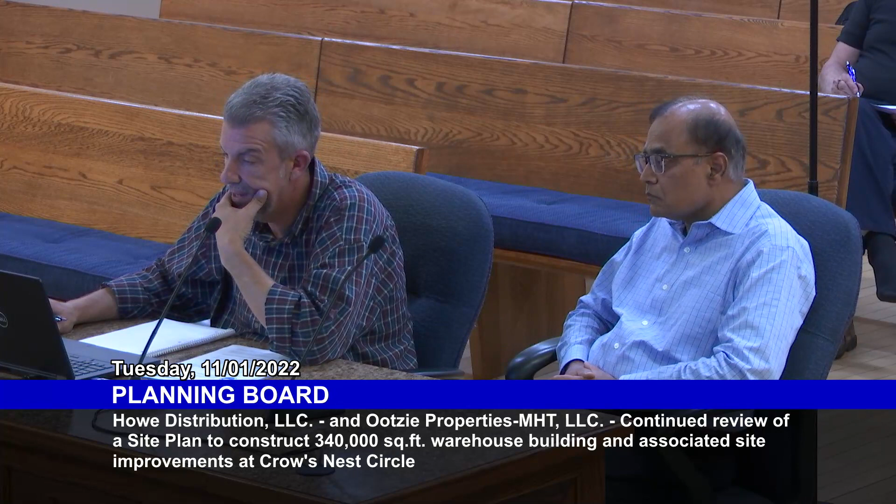Good evening, board members. Again, we are here to discuss this warehouse project that was before you last meeting. We have done some adjustments and revisions and tried to address some comments as best we could in the limited time frame.

Again, we are in front of you for an approval or conditional approval of the proposed warehouse project. Some of the comments you folks had brought up in the last meeting, such as providing a truck turning plan, we did provide that in the most updated set. We did call out the walls a little more clearly with elevations and whatnot. We did put some signage to address truck access, as we had talked before, with the truck access being this southern entrance closest to Mast Road and the vehicular access being at the end of the cul-de-sac.

We are asking for additional waivers. We did look at the sight distance, and we would add that because of the speed that vehicles are approaching into this road, it not being a through street, less reaction time is needed, which is typical of the sight distance plan and profile.

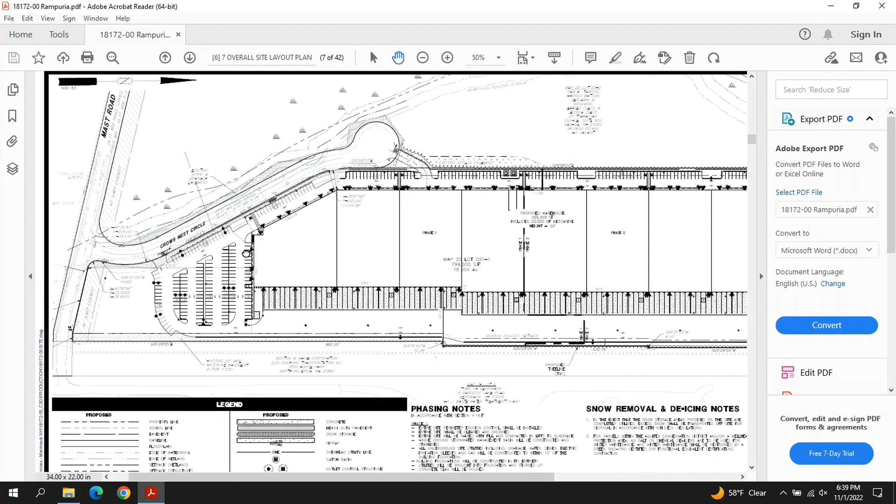We would also reiterate that the truck entrance being at the southern portion of the site, their sight line is actually going to be much higher in the air than the vehicles exiting the cul-de-sac. So we'd be happy to address and do the sight distance plan and profile if that's the board's pleasure, but we feel that, based on this road being only for this particular lot at this time, and the fact that a vehicle needs to slow down quite extensively as it enters the cul-de-sac, that it's not really what we would consider a safety issue.

Aren't site distances speed dependent? Typically, yes. DOT recommends 400 feet sight distance in either direction. At what speed though? That is, I believe, for 40 miles per hour. So you'd have a shorter sight distance on your slower road because this doesn't have a 40-mile-an-hour speed limit, correct? And obviously at the southern entrance, we're pretty much looking at Mast Road. And then at the cul-de-sac portion, they have the whole road worth of length.

I wanted somebody to confirm for me that site distances were speed dependent, but assuming that they are, then whatever you would have to show on the plan would be decreased because you're obviously on a low speed limit road. We would anticipate maybe 10 miles an hour on this road, simply because of the size of the vehicles and the fact that it's at a dead end cul-de-sac.

So Crow's Nest Circle is a public road, is it not? Yes, it is. And based off the speed limit of the road, the town standard speed limit is 30 miles an hour. So what would the sight distance requirement be for a 30-mile-an-hour road?

That would be the standard determined in our right-of-way permit regulations that the Public Works Department has. I don't have those specifics, they're referenced in the regulations, but we don't have a specific requirement. But the necessary sight distance changes based on speed limit, is that true? That's correct. Generally for a 35-mile-an-hour road you're looking at 300 to 350 feet of sight distance, and it might be slightly less for 30 miles per hour.

What's the length of Crow's Nest Circle? The whole road? I think it's a little over 1,000 feet to the end of the bulb. Okay, so 300 feet is roughly about a third the length.

Whether you have 300 feet or not, the board could consider whether it wanted to grant a waiver of that requirement, but without seeing it on the plan, we don't know what the sight distance available is, so we don't know if it's compliant. That's the reason we're not supporting the waiver, we don't know what distance is actually available there. When we get to the point of talking about waivers, you'll have an opportunity to present whatever argument you want, and the board will hear you and have questions and proceed from there.

Sorry for the interruption. We did go in front of the Conservation Commission and got some of their comments regarding using straw instead of hay, and the fertilizer requirement of no phosphate. I believe we addressed most of those, catching all the particular items they called out.

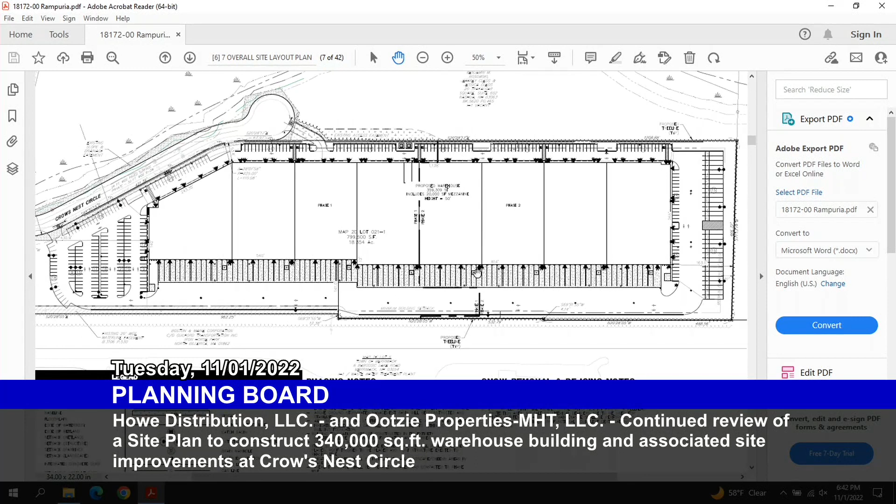Not much has changed from what we had before as far as overall site layout, it's still the same. We've added some directional signage stating no trucks at the end of the access to the site at the cul-de-sac, demarcating truck entrance on the southern portion, and additional signage on this corner of the building to keep trucks from going around there unless it's an emergency fire situation. Everything previously shown stays the same, all underground stormwater systems minus the above-ground pond at the southern end of the site.

And again, for septics, we have still not had any response from Pennichuck. We've been in contact with them from the beginning of this project to do some pressure tests and whatnot, but we still have not gotten any response from them directly.

What was Pennichuck's role in your septic plan? Well, Pennichuck will be supplying the water. They've also got a water line easement running through the back of the property, a 12-inch line I believe. Our intent is to connect to their line, so we'll need to meet their requirements. Oh, for water service, I thought you were saying something about your septic system. No, I was just stating we're still obviously going to be on septic as well. Okay, so on-site wastewater, thank you.

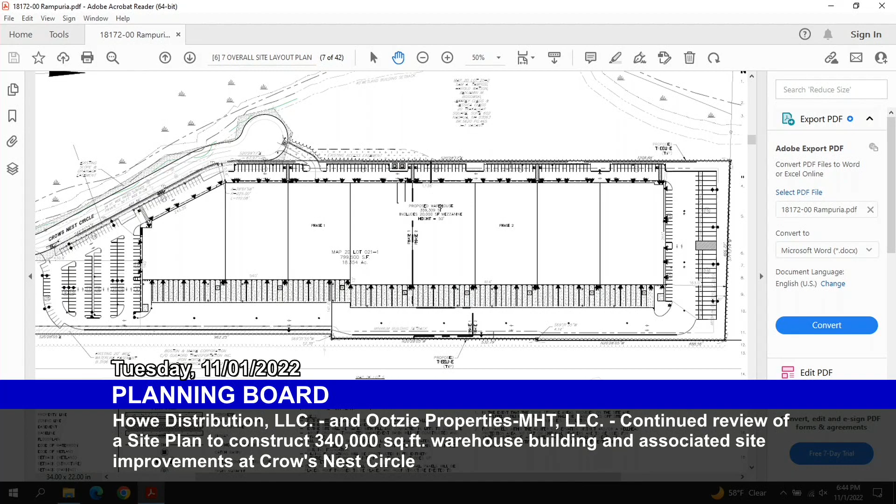Anything else you'd like to present to us? I know there was some discussion about wall height. We have looked at that - it's more of an interpretation of the base, below-grade level of the wall and the top of the wall. We've made a couple of minor adjustments, but we don't see an issue meeting that requirement.

So your plans are to lower the height of the wall to satisfy the community development department's interpretation of the regulation? Yes. With the type of wall we're proposing, it's roughly an 8-inch difference with the base block being buried - that's how it's considered height-wise, from the buried block to the top. That makes sense.

Anything else? Oh sorry, Lynn, go ahead. Matt, when you were talking about landscaping and parking, you've got 3 island sets of parking, and you said you're going to do some landscaping on the middle one - is that eliminating that parking? No, we ended up creating... let me just get to a point where you can see it a little better here.

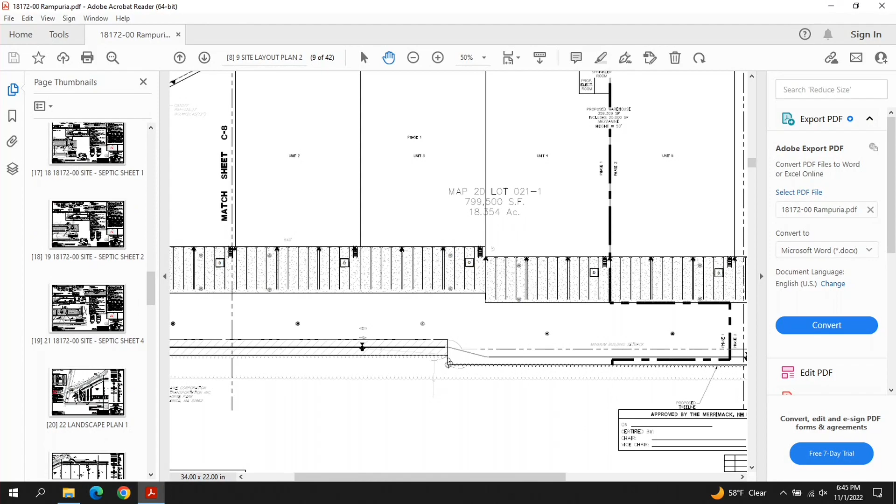You're just putting green stuff in between, adding some green space. It's breaking up and helping us also capture and break up some of the runoff that was originally coming across this whole parking lot. So we've added this island right here, and that's going to have green stuff in it.

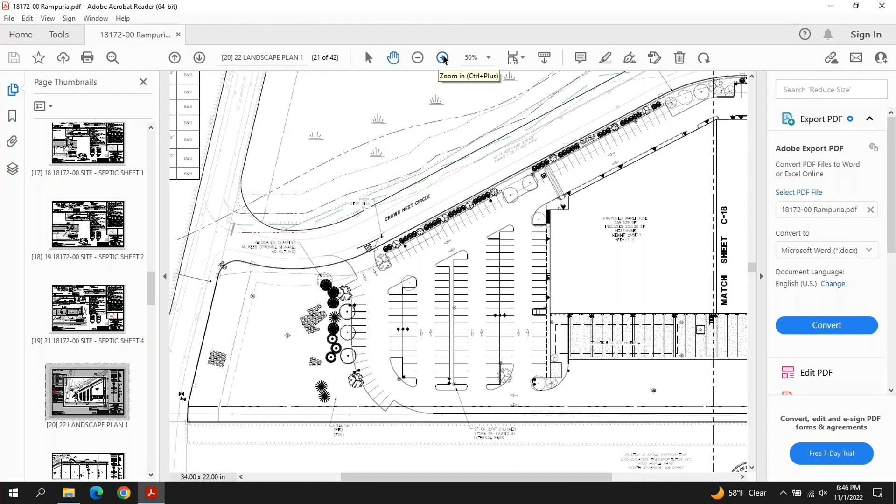How much area is there to plant bushes and trees? It's like a foot or two. I can measure it and tell you actually. Doesn't look very big. Yeah, it's probably about 4 or 5 feet is my guess.

How long's the parking space? 18 feet long is the parking space, so that's about right, 9 by 18, so it looks to be about half that. So what's new is the strip of green grass or whatever it will be that's in front of where the cars park, not the islands at the end. Correct, not the terminal islands. That's correct.

Thank you for that. Anything else that you'd like to present to us as part of the update? Again, we've used the biggest trucks, the WB-67s, and included a truck turning plan, which I believe the board had asked about before.

Again, these truck turning plans are usually pretty standard, but we have broken out the truck entering and exiting, and obviously these are WB-67s, which are interstate hauler trucks, as the worst case scenario.

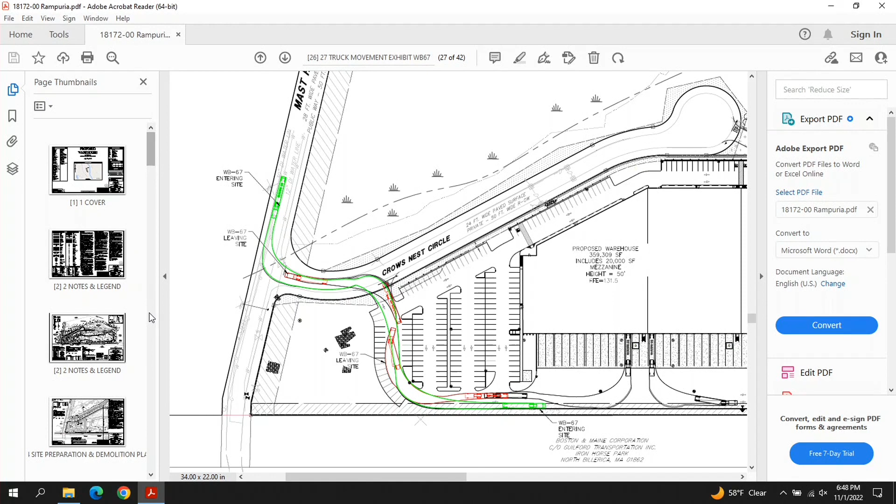Well, just going back to the landscaping issue, I don't see this, I didn't see the landscaping that he's talking about on the plan. If you go back to the one with the landscape, you don't show any trees or bushes or shrubbery in those islands or end caps for that matter.

Yeah, we've called it green space because again it's fairly minimal in nature as far as width. Trees don't typically do well in spaces 5 feet or under. I agree, so we would probably do ground cover, either grass or something of that sort that would fill in that space.

So inside the interior of the parking lot, I do see a couple of trees at the terminal ends, and then around the border. Can you walk us through what it is that you've got proposed?

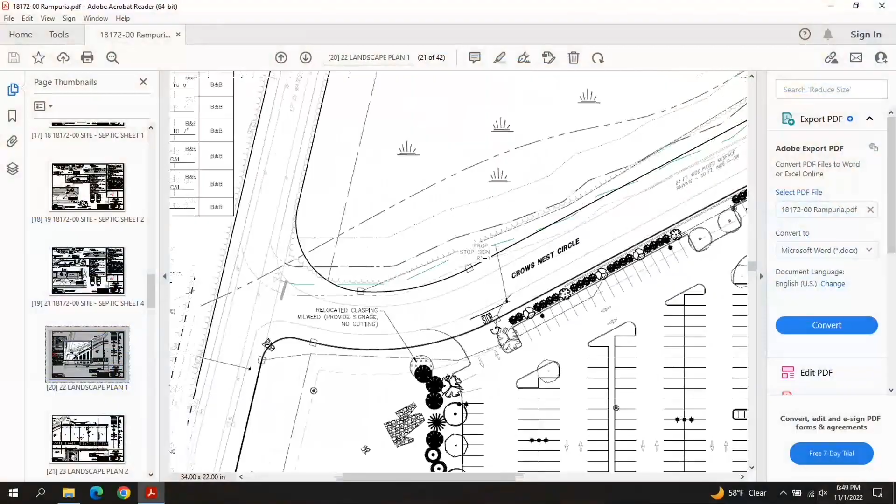Sure, you're talking types of trees and generally the size? Yeah, well I think the standard is again 3 to 3.5 calipers required for the trees. These are obviously in the islands here. We have provided shade trees.

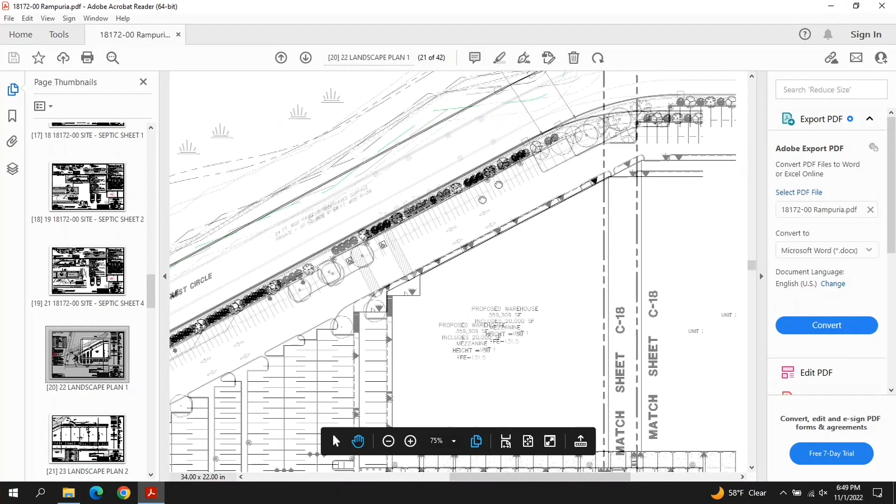Could you show those? I'm missing them. Oh, that one, yeah, so we've got one here, another one here, these over here. We're surrounding pretty much the whole parking area based on the number of parking spaces, so we have some evergreens up in here. But the majority of these are going to be deciduous trees that create some kind of shade along the edge of the parking.

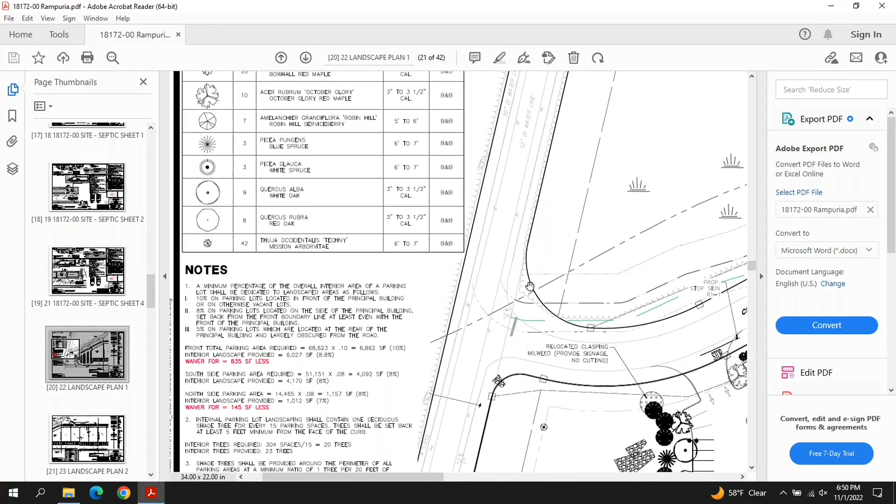And most of them are again salt tolerant species, salt and drought tolerant.

Now, I was reading the note that you added regarding snow maintenance, and it talked about snow storage and trucking it off site and all that. And the note wasn't really clear on the screen, the video screen, about the no salt or the Sno-Pro. Can you find that note for me again?

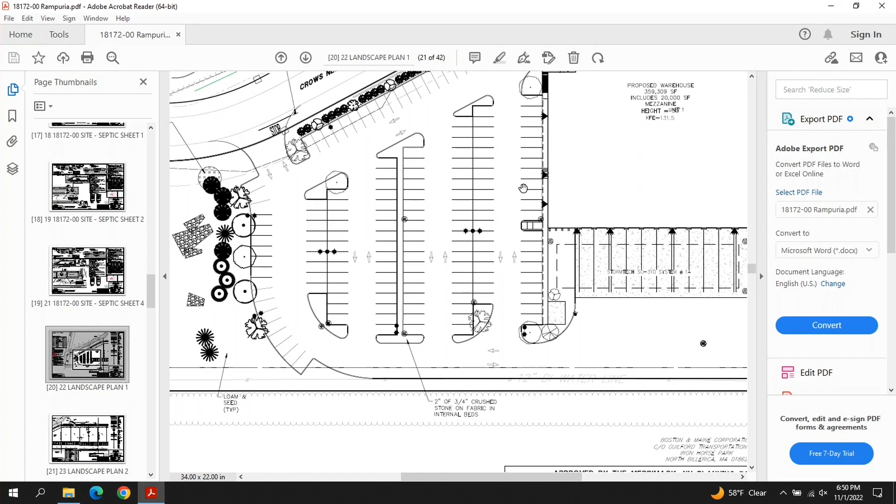I think that was on your overall site plan. Yes, I think so. It was separate, down here. There it is, to the right.

So for parcels within the Aquifer Conservation District or wellhead protection area, no salt or chemical deicers are to be used for winter maintenance, and winter maintenance shall be performed by a Green Sno-Pro contractor. Are you within the Aquifer Conservation and wellhead protection area for this? Wellhead, no. Aquifer, yes.

So you're going to have a no salt limitation on the site, and no de-icing, no salt or other de-icing chemicals on the site.

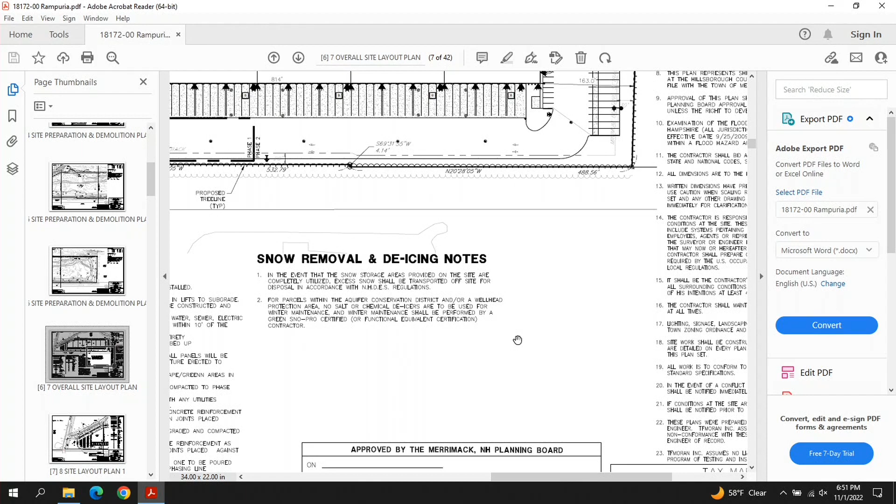I'm certainly glad the trees you're picking are salt resistant, but that shouldn't be an issue. Nelson, did you have other questions? Not on this particular subject. I don't think much of that landscaping plan, but that's not a question.

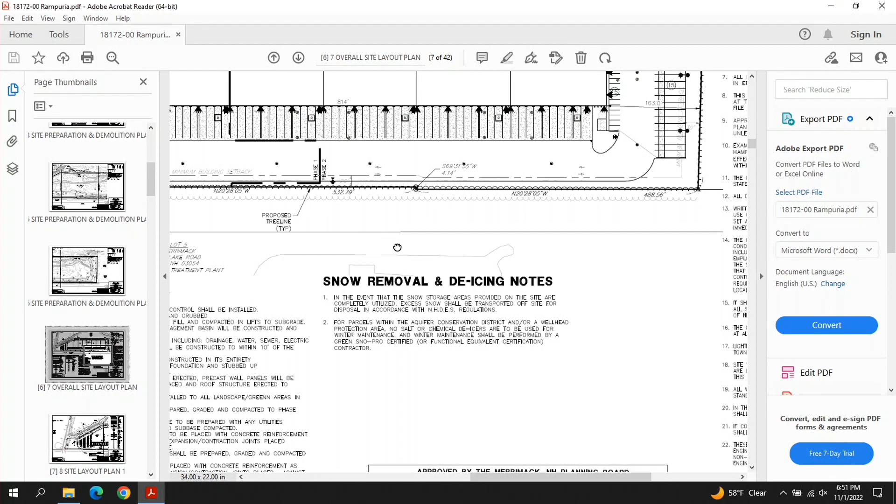Well, it's a worthwhile comment. If we were looking at a building with some significant public face, I would have more interest in detail into the landscaping plan. But down at the bottom of this road, where it is the last thing you see before you cross into the sewer treatment plant, I don't know that the choice of landscaping is particularly important there, but understand, at least some.

Other members of the board with comments or questions? I see this abuts the railroad. Have you given any thought to adding a switch for rail access for freight to this location? No, that was not part of any discussion. You can see pretty much the width of the railroad right of way and where it jogs further to the south. Their track is aligned center to that, so whatever they choose to do as far as making adjustments or widening falls within that right of way. But we have not looked at that. Anything's possible in the future, but it wasn't considered with this.

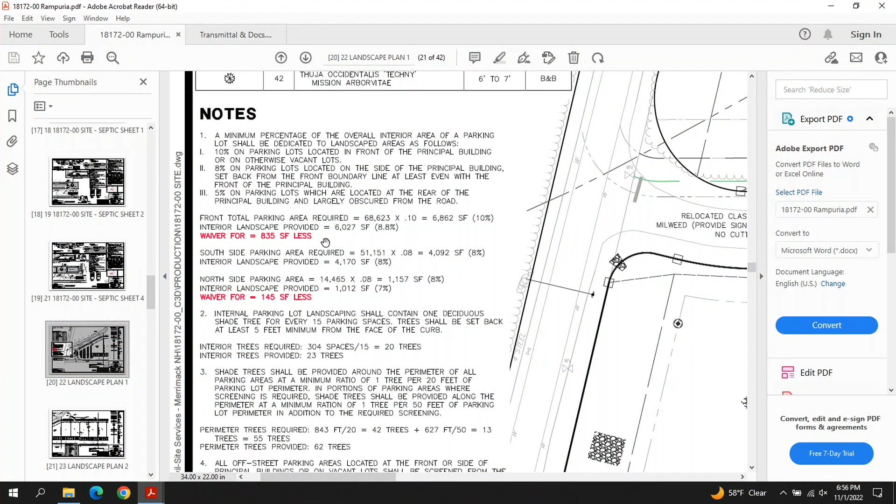Let me just jump back to the landscape plan, because that has obviously changed here. So the breakdown is based on kind of the front parking lot, which is the area to the west, where 10% is required, and we're at 8.8%, or 835 square feet less than what's required. The north parking area would be at the far end of the building where the truck parking is, and again we're at 7% where 8% is required, or 145 square feet less.

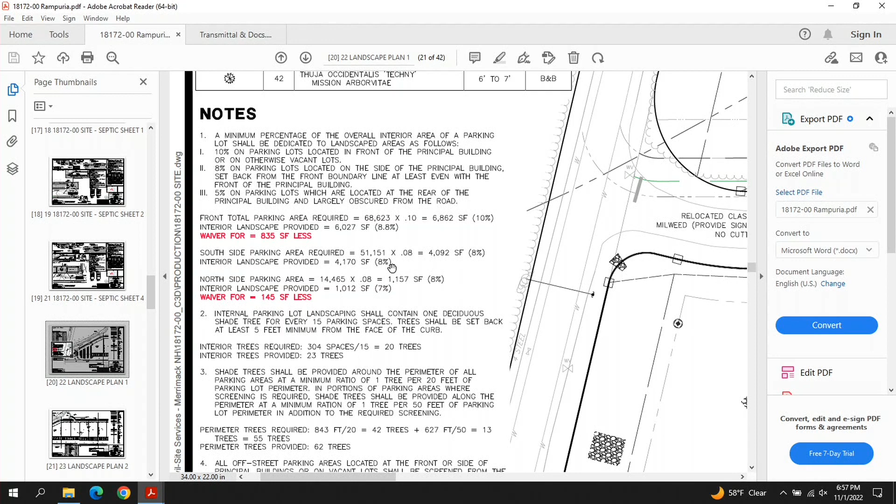Now, what's required of the tree setback from pavement section? That would be 5 feet. And what are you going to provide? I believe we have 10 feet between pretty much the edge of the pavement and the retaining wall, or the property line. The retaining wall is slightly off of that, but we have a guardrail right at the edge of the bituminous curb. So those trees -- the 5 feet is to protect the trees from being hit by vehicles and snowplows, because of the situation along Crow's Nest Circle and the minimal area. The trees will be protected as they'll be behind the guardrail, so the 5 feet kind of becomes a moot point.

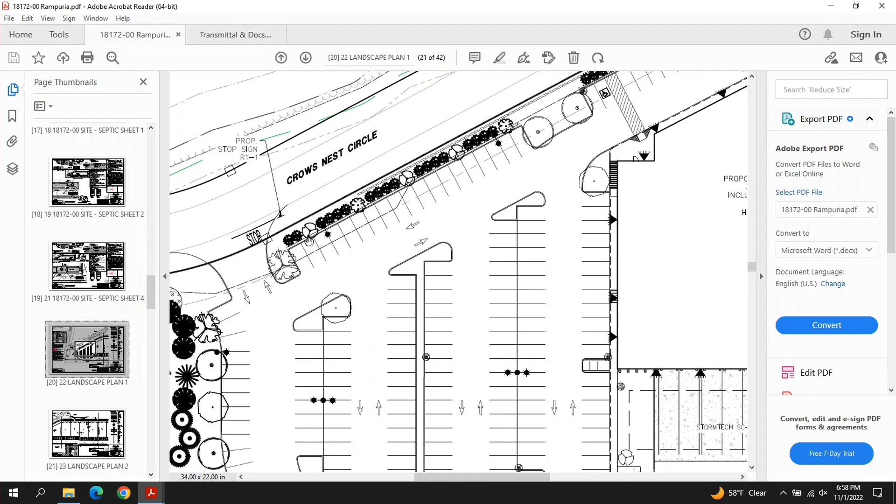I understand. How close are they going to be, feet-wise? I would say if we are at 10 feet, probably about 4. Do you have any concerns that the trees being closer to the pavement will cause damage to the pavement? Not based on the type of soils we have out there -- they're pretty loosely graded.

We don't have a particular concern. The trees located on that portion of the site where it's tighter are smaller species, with less extensive root systems. Certainly makes a lot of sense to me.

I just want to make sure you understand the expectation is that you'll maintain the number of parking spaces that are part of your site plan, and that they'll be useful and won't be in disrepair or end up being snow storage because nobody parks in them.

What's the requirement for the 15-inch trees? That requirement is that the applicant has to identify all trees on the site over 15 inches in diameter. Given the size and nature of the site, that would be an extraordinary expense to identify all those trees.

Where generally are the existing trees located that are of that size? Are they in the front? From my experience being on site and doing a lot of the test pitting, there's a few on the front end.

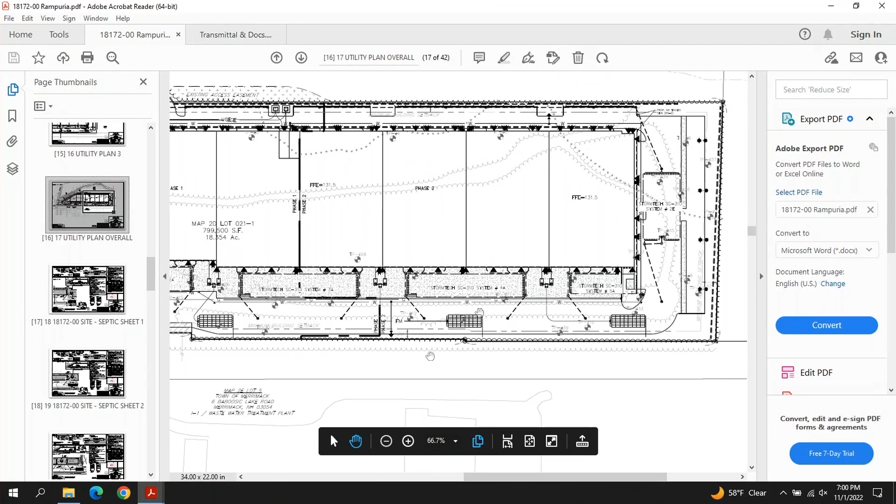Along this edge, because this whole property, as you can see based on the underlying image, you can see the path through here. So this was logged, I believe, back in 2008 or somewhere around there.

So it had been cleared before. So the size of the trees there currently are, most of them are not even close to 15 inches. Okay, certainly understand that.

Won't you have to get an AOT permit for this? Yes. Aren't they gonna make you map your trees? They will not make us locate 15-inch trees, they typically have us locate the limits of the trees, not the size. Now, either of those things is existing conditions - none of that's gonna remain on the site, correct?

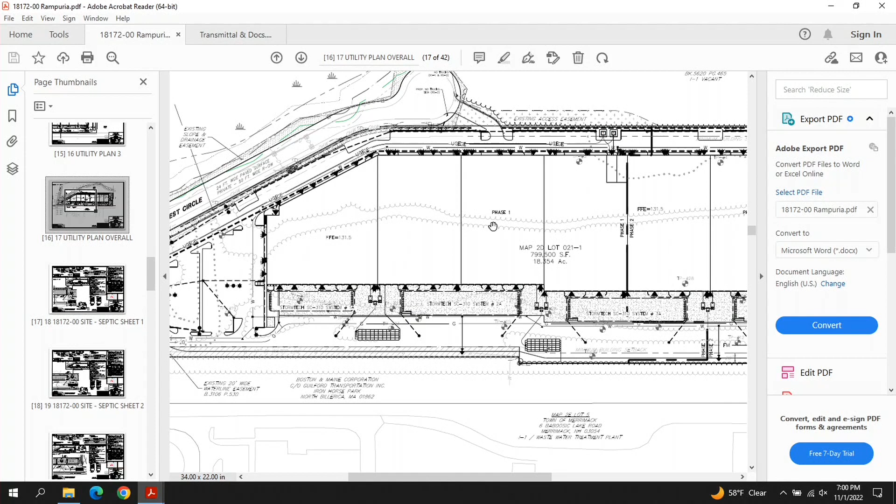Correct. We are pretty much impacting property line to property line. Is there any existing undisturbed forested area that will remain? Maybe a very small portion up on this corner near the existing water line easement.

Is there any existing undisturbed area that you are committed to leaving, or might there be some or might there not? There might be some, we're not necessarily sure. With that water line easement going through there, Pennichuck is going to make sure that nothing grows through there anyway.

With that in mind, I certainly don't see any need for us to have you map out trees that are going to be removed. With that, board members, do you have questions about the 3 landscape waivers that have been discussed?

Could you enumerate them again please? Sure, do you want the section numbers or just what they're about? The 3 waivers are: internal parking lot landscaping, the minimum setback of the trees from the pavement, and the location and identification of trees greater than 15 inches in diameter.

We're not talking about sight distance or the pipe size at this point. Correct. Thank you. Does that make sense? Does anybody have questions about the waivers we've asked about?

Whoever makes the motion, please make sure you add your justification for the 2 statutory criteria. Is someone willing to make a motion related to those 3 waivers? I would motion to approve those 3 waivers due to being an undue burden on the applicant.

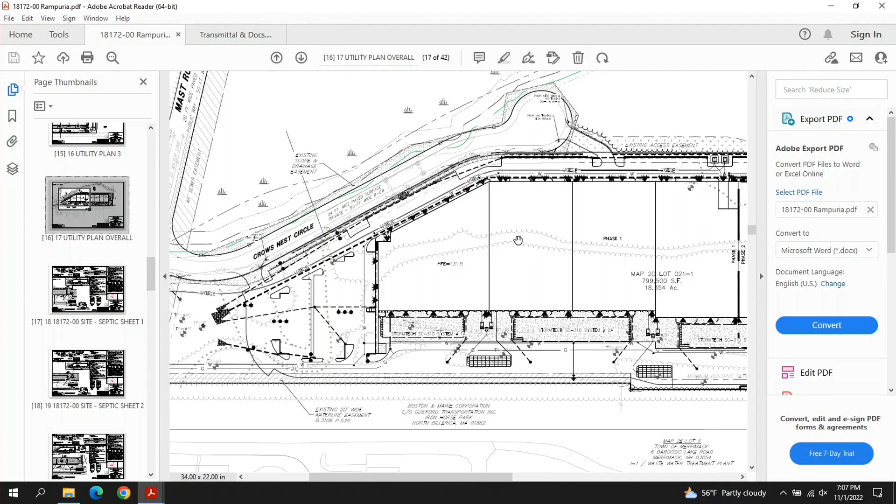I don't know how it became to that point. We're using a lot of 12-inch to begin with at the beginning of our drainage runs, simply because we're filling this whole front of the site roughly 5 feet to get everything up higher. And it's relatively flat. Our pipes are running flat, and pretty much everything that's running to the basin on the south side is building up, and these pipes are acting as somewhat of detention for a short period of time, just with the storm run, depending on the storm. The requirement is a 25-year storm for industrial, I believe. And so in order to keep the pipe shallow, based on cover, we've gone with a smaller pipe at the beginning, and then obviously it gets larger as more drainage combines.

We're increasing pipe size, but we'd like to be able to keep the 12-inch again, because it's all on site, and there's nothing in the right of way that's under 15. We provide a 15-inch inlet. Did our peer review folks pick up on the issue or suggest that a 12-inch pipe would not function sufficiently? No, they just pointed out the regulatory requirements. So it's a regulatory requirement, but functionally, all the engineers think it'll work. Based on the peer review, there does not appear to be any functional drainage issue because of the pipe size.

Sounds like a perfect candidate for a waiver to me. Nelson, he did say that it was sized for a 25-year storm. Is that correct? That is what the town requirement is for our type of regs. And do you have to look at a 50-year storm, or have you?

We've looked at the 50 to make sure nothing tops out of the structures, and we don't have any particular issue with anything coming out of the catch basins. That's typically how you look at it, is how much in a 50-year storm, if it was to pond outside of that catch basin top. There's sufficient freeboard for the 50-year storm.

There's sufficient freeboard, that space, to make sure that it doesn't overtop in the 50-year storm. The pipe dimension's a different question because it depends on how fast you get your 50-year storm. But either way, our engineers are not citing it as being a problem for performance.

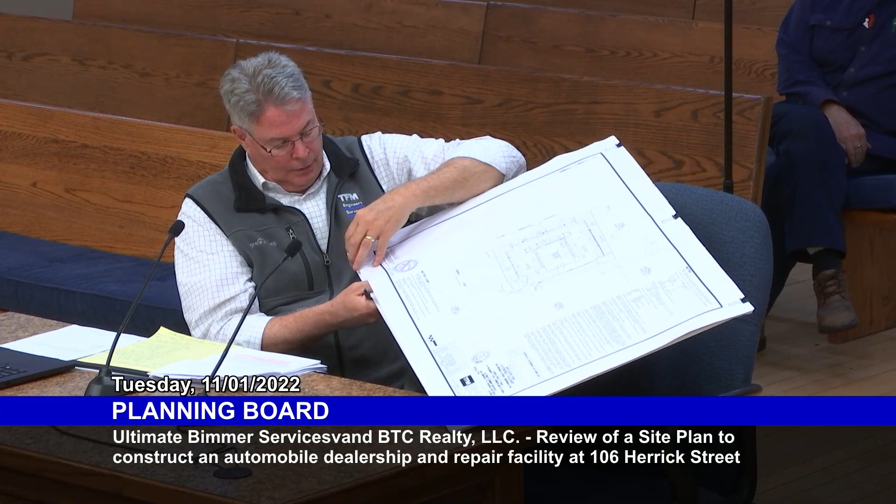Staff would just note that the waiver was granted previously in the original approval. The other thing to remember with this site is that if you're on DW Highway, it's kind of in a bowl, so you're going to be seeing above those trees and landscaping regardless from DW.

So what we had done with this landscaping, we supply the number and size of trees that are required within there. We just don't have additional green space in these areas. So you can see we've planted trees completely around the development.

This area, the board had actually raised the question of us cleaning up this corner at Herrick Street and DW Highway. This wasn't our idea, but we agreed to do that. So you can see we've put some focal point shrubs and trees on the corner, a couple other shade type trees, and one other little cluster of shrubs and trees as you come in. The rest would be lawn, and they would agree to maintain that.

So from the waiver standpoint, we've asked for an area reduction, but we have supplied all the trees and shrub numbers that are required in your regulations. As we stated back in 2020, the design intent is certainly met here. It's just the specific circumstances, as a hint for whoever's making the motion.

Thank you for that. So, Tim - stormwater, what we're proposing to do is call for an underground system here, a storm tech system. We are placing gas and oil separator hoods in the structures at either end as the water enters so that we would capture anything that would come off. Tremendous soils on the property, so we're infiltrating most of the runoff.

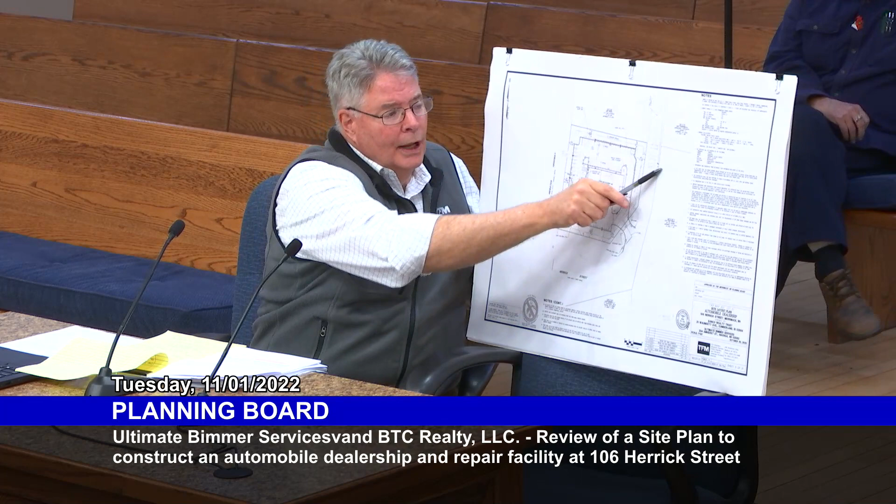Right now, like Tim said, this is kind of a bowl. There's a low pocket here and a low pocket on either side of the property. Everything makes its way to an 18-inch pipe that crosses there. So we've made sure we've decreased or equaled the runoff pre to post for all storms up through the 50-year storm event. Most of the stormwater is treated and infiltrated here.

The storm tech system has an isolator row that captures sediments, as well as the usual 3-foot sumps in the structures to collect that. We had submitted a maintenance plan on sheet 15 pertaining to this. We had done a full maintenance and operations plan - my guy didn't submit it, but we'll provide that. It calls for sweeping of the parking lots and cleaning out the sumps. This is something the state and towns with MS4 programs are requiring.

I've gone over sewer and water. We'd submitted a traffic report previously. Basically, what it came down to is roughly 28 new trips AM peak, 32 PM peak, and 28 midday Saturday peak. This plays out to about one trip every 2 minutes or so. The reason it's looked at as not significant is that it fits into the typical background growth you'd see on a roadway of this caliber.

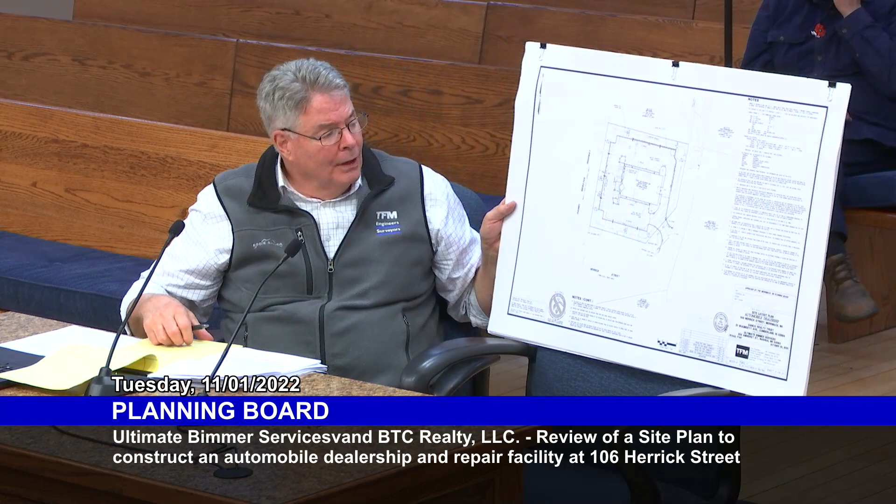Sidewalks had come up previously. When that was discussed, there are no sidewalks on Herrick Street or DW Highway, and at the time it was agreed that there really was no place for someone to walk in this location or a reason to have a sidewalk. So it's up to the board to have that discussion.

So I will answer any questions that you might have. Thank you for the presentation.

Board members, the first task before us is determining completeness. Does the board have any questions for the applicant related to the information submitted and whether it's complete?

Just one question, Mr. Chairman. I didn't find the lighting plan in my package - is it there and I missed it, or was one not submitted? At least it's in the full package.

Should be sheet L1, which is the second to last sheet in the plan set, Nelson. Got it, thank you.

Okay, no further questions on that, Mr. Chairman. I did bring some 11 by 17s of the architectural elevation if you want to see it. Yes, we will want that, we want it to be part of the submittal. Do you want to pass that out?

Please pass those around. One of the questions I have is how does this site relate to the other site at the former DCU bank site? Are they going to be in common ownership and work in some harmonious way, or are they just two separate businesses? The owner's still determining that right now.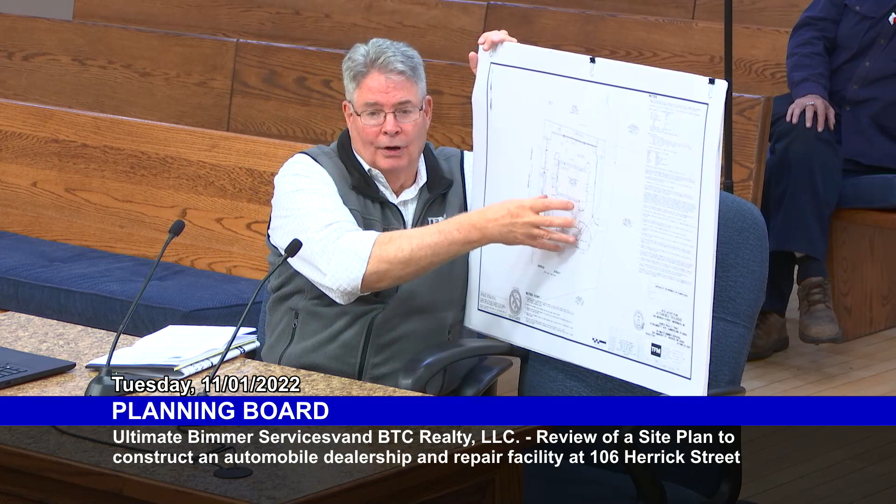The numbers are, the rate of runoff is pretty small, like 1 or 2 CFS that goes to that and leaves the site. We're making sure that we have not increased that. In most of the storms, we decrease it slightly, and the way we're doing that is we're infiltrating the majority of the runoff within the system. But of what goes off your site, do you know that it goes to the river? Yeah, we didn't trace it any further, don't know where it goes from there, and assume that that's good enough.

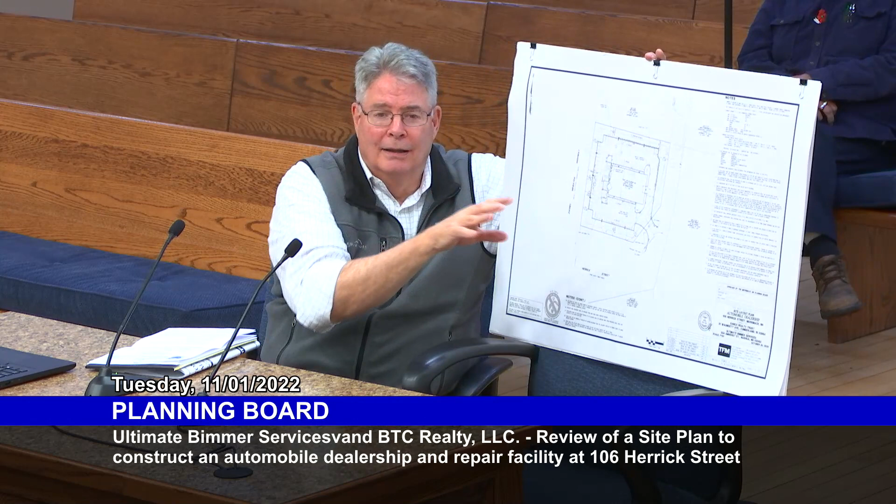Well, I guess what's the landowner's responsibility? We have runoff that's sheeting off Daniel Webster Highway onto this site, and the landowner is responsible to deal with that, right? That's an existing situation. So basically we're maintaining the same flow pattern and rate that exists today when we're finished, that's what we target, so we don't change that and don't affect the guy downstream of us or off our site. That's my concern. Okay, I wanted to ask the question, don't have an answer, but okay.

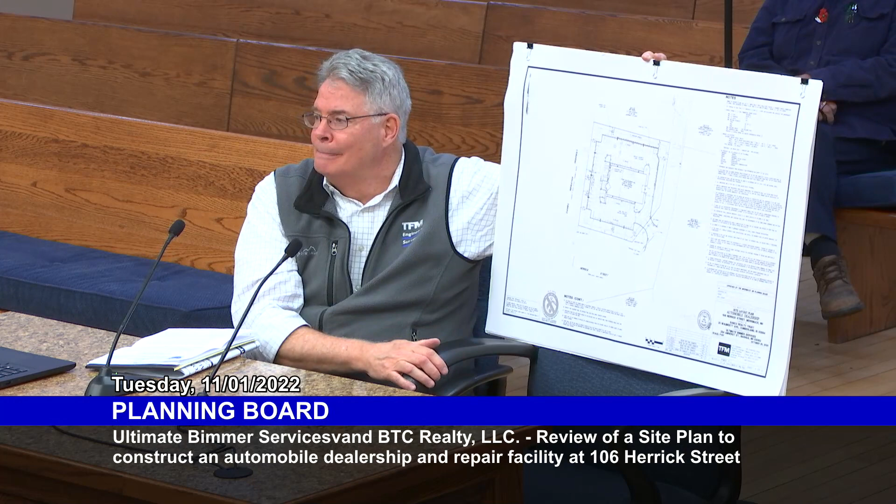Other comments or questions? Quick question. Obviously this site's pretty sunken in. Have you guys decided where you're gonna put like a pylon sign, or are you gonna do something that sticks up into the air? He was just gonna use building mounted signage on the building itself. If you look at one of these pictures, we did show you, you can see it, the sign right there. I was just curious.

Maureen, you had a question? Thanks, I just have a question on page 2. It speaks about before there was not a requirement for a sidewalk, but it's up to the discretion of the board. I know Nelson's been really working on sidewalks, and we like having them, so I don't know if that's anything the board wanted to talk about. It wasn't that it wasn't required, it was under these regulations - the board made the determination in 2020 that one was not required here.

Thank you. Yeah, the problem being, Maureen, that it doesn't connect to any existing sidewalks on either side. Now there is sidewalk on the opposite side of Route 3, but I don't know if we want to encourage people to cross at this point to get to the sidewalk on the other side. In this particular section I don't think that would be advisable. I'm not sure how far where the sidewalk is in this - I know there is some up and down the street a little ways, but not right across the street. No, it's a fair amount. There is just, so this is the parcel across from Citizens Bank.

Right, so the Citizens Bank, it does go down into a neighborhood, so that's what I was thinking. I'd use the term 'neighborhood' loosely, it's not actually - it's more business than neighborhood. It looks like down there, King Street Auto Body, Mike's Auto Body, Herrick Street. There are a couple of residential houses, but most of it is commercial.